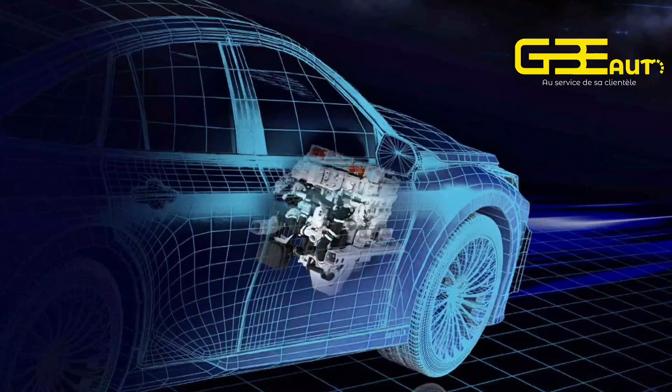Toyota announced on February 14, 2025, the development of its new third-generation fuel cell system, marking a decisive step in its mission to promote a hydrogen society. This technological advancement is part of a broader strategy aimed at harnessing hydrogen's potential as a clean, renewable energy solution, offering an alternative to fossil fuels and contributing to the reduction of CO2 emissions.

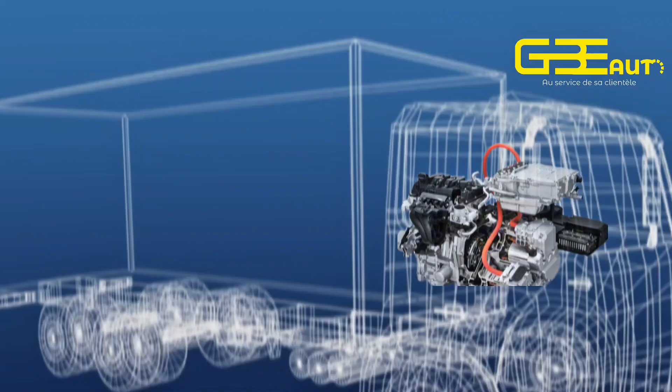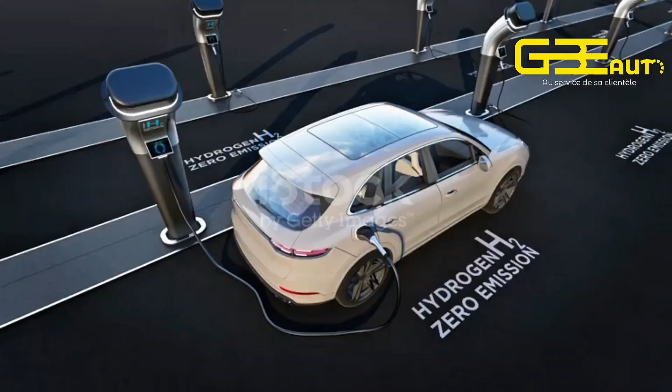Since the production of the Toyota Mirai in 2014, Toyota has been a pioneer in the hydrogen vehicle industry, and with this new technology, the brand reaffirms its role as a leader in this field. The third-generation fuel cell system stands out due to several major improvements.

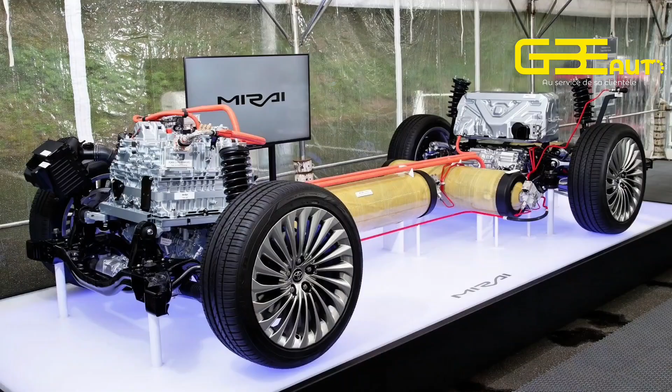First, the system's durability has been significantly enhanced, with a lifespan comparable to that of traditional internal combustion engines and reduced maintenance. This system is also more energy efficient, offering a 20% higher efficiency compared to the previous generation. This translates into increased range for vehicles, a key factor in strengthening the competitiveness of hydrogen vehicles against other energy technologies.

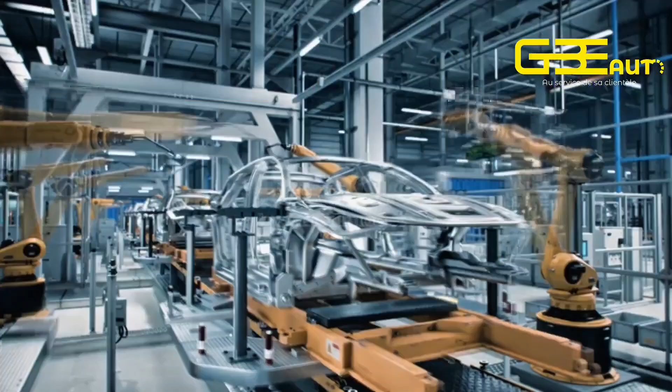Finally, through optimization of the production chain and the use of less expensive materials, Toyota has significantly reduced manufacturing costs, making hydrogen vehicles more accessible to a wider audience. This system is not limited to passenger cars.

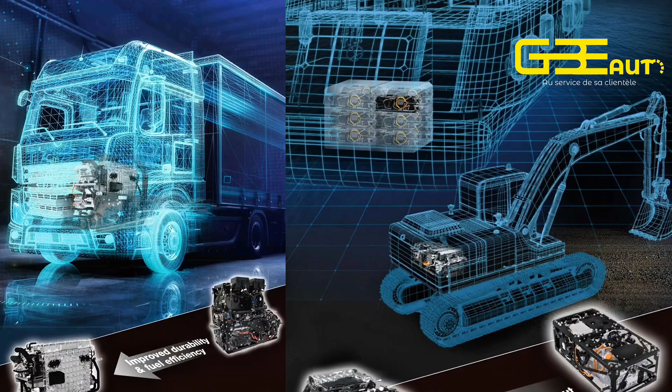It is designed to be versatile and can be integrated into a variety of vehicles, including buses, trucks, and even trains. This flexibility paves the way for broader hydrogen adoption in public transport and freight transport sectors, which are responsible for a large portion of greenhouse gas emissions. Hydrogen trucks, for example, could replace heavy diesel trucks, contributing to the decarbonization of the freight transport sector.

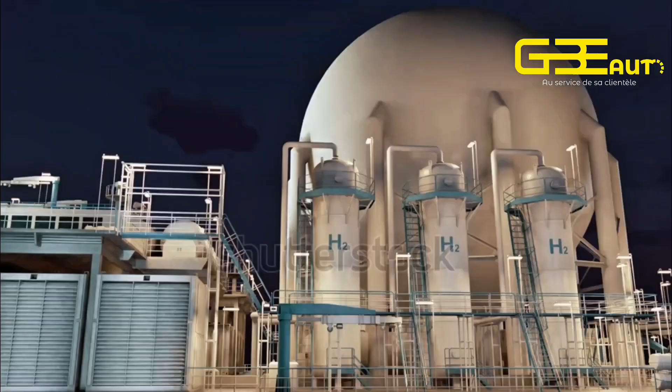Furthermore, the system can be used in stationary applications such as power generators, an ideal solution for remote areas or applications requiring continuous power. Hydrogen is considered a clean energy source because when used in a fuel cell, it produces only water and energy with no CO2 emissions. Its production can be sourced from various renewable energy sources, enhancing its sustainability.

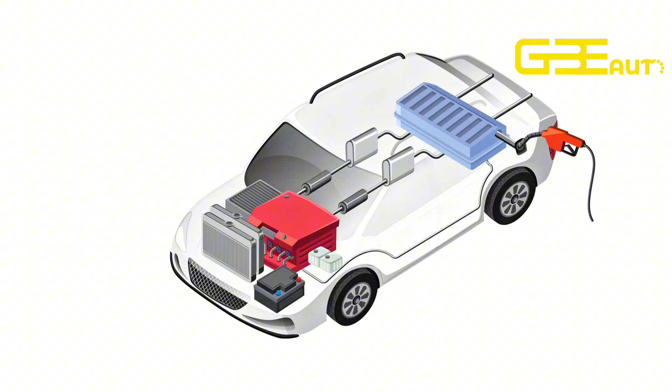However, despite its advantages, large-scale hydrogen adoption still faces several challenges, including the lack of refueling infrastructure. Toyota, aware of this issue, is collaborating with other industry players and governments to develop a hydrogen refueling infrastructure, particularly in European, North American, and Japanese countries where this technology shows the most promise.

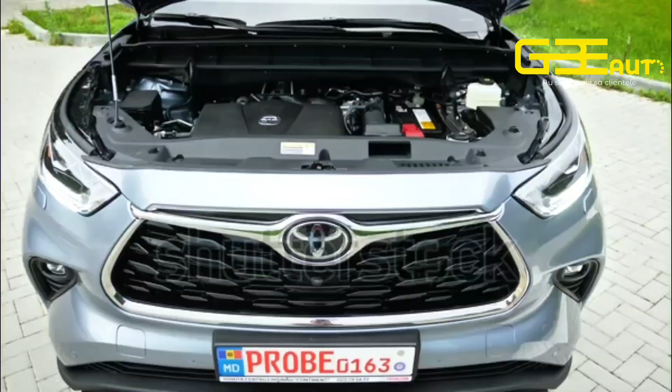The deployment of this new third-generation fuel cell system is planned for 2026, with an official presentation at the H2 and FC Expo in Tokyo in February 2025. Toyota also aims to expand this technology into other industrial sectors, thus contributing to carbon footprint reduction in various fields, from transport to energy production.

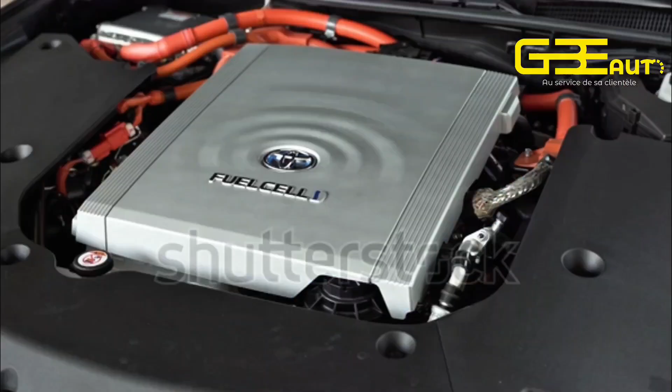This fuel cell system is part of Toyota's broader vision for a global energy transition, with the goal of making hydrogen vehicles accessible to a larger number of consumers while accelerating the adoption of this technology worldwide. In parallel, Toyota continues to collaborate with various industrial and governmental partners to create a favorable ecosystem for hydrogen as a fuel of the future.

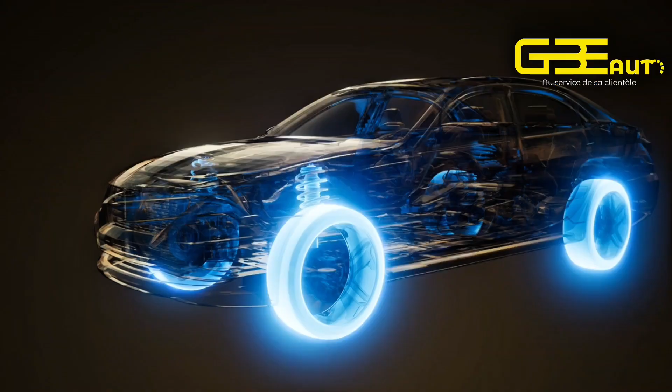The improvements introduced by this new fuel cell system could very well be a turning point for the automotive industry, offering a viable and sustainable alternative to the internal combustion engine. By combining better efficiency, increased durability, and cost reduction, Toyota hopes to accelerate the transition to zero-emission vehicles and make hydrogen a widely used energy source worldwide.

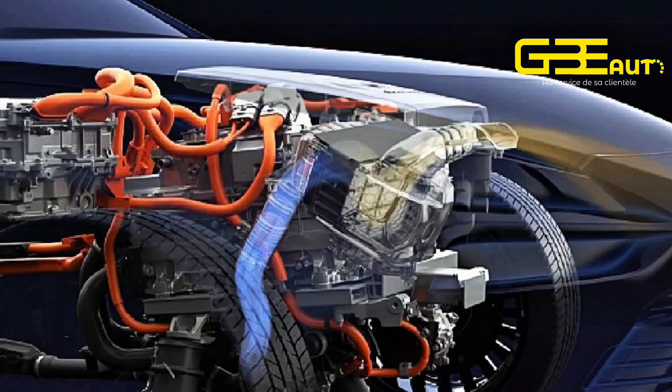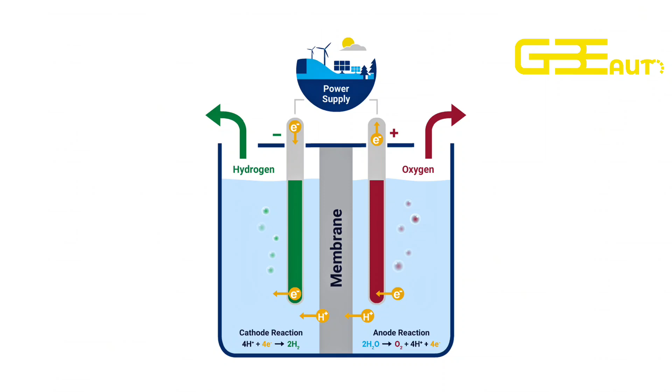In summary, Toyota's third-gen fuel cell system is not just a technological advancement for automobiles. It could well be the catalyst for an energy revolution, transforming the way humanity consumes energy and reducing its ecological footprint.